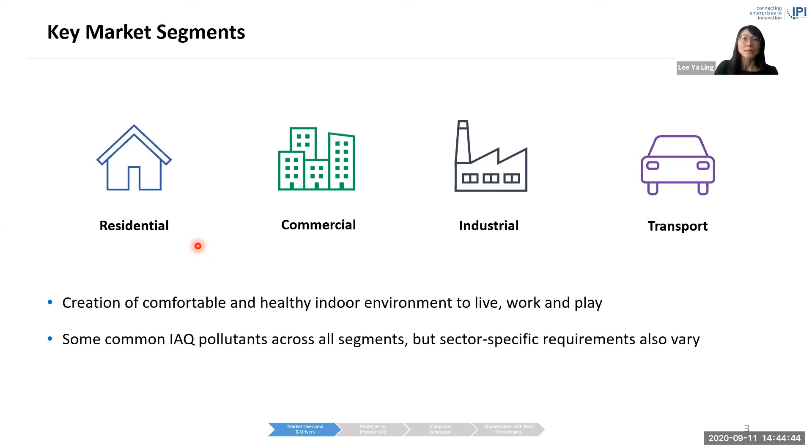So for example, in vehicles, fine particles, as well as gaseous pollutants such as NOx or SO2, would be the more critical indoor air pollutants for us to look into. In our study here, we have focused more on the residential and commercial market segments. But I'd also like everyone to keep in mind that the IAQ solutions developed or implemented in one sector may also have the potential to be cross-applied in another.

So a quick view of the IAQ market outlook. The global IAQ market solutions that cover both products and services are expected to grow by 9.5 billion by 2024. And the US market is also expected to grow and reach 12.2 billion by 2023. But the fastest growth is expected in APAC, with about 33% expected to come from this region.

But do note that these numbers came from reports published pre-COVID-19. As the market conditions are impacted by the pandemic and the constantly evolving situation, these numbers will likely change. But considering the relevance of IAQ in this current situation, we do believe that there are still growth opportunities in this market.

So we'll take a look at some of the main market drivers that can contribute to the growth of the IAQ market. Firstly, declining indoor air quality. We see now the IAQ level is declining faster than the implementation of strategies and adoption of air cleaning solutions. This also corresponds with declining outdoor air quality, due to urbanization and changing human consumption patterns. The impact of IAQ on health and well-being also significantly drives consumer demand, not only for residential air cleaning solutions, but also for healthier commercial spaces.

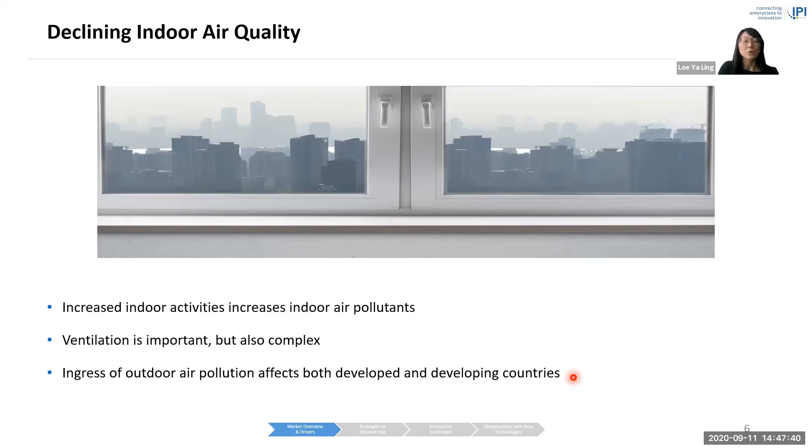In recent years, there is also increasing usage of IAQ monitors, which also plays a part in augmenting the occupants' awareness of the importance of IAQ. The pandemic has also amplified the observation that consumers are becoming increasingly aware, or conscious, of the importance of the safety aspect of indoor air, because we know that indoor spaces pose a higher risk in the spread of airborne diseases compared to outdoor ones.

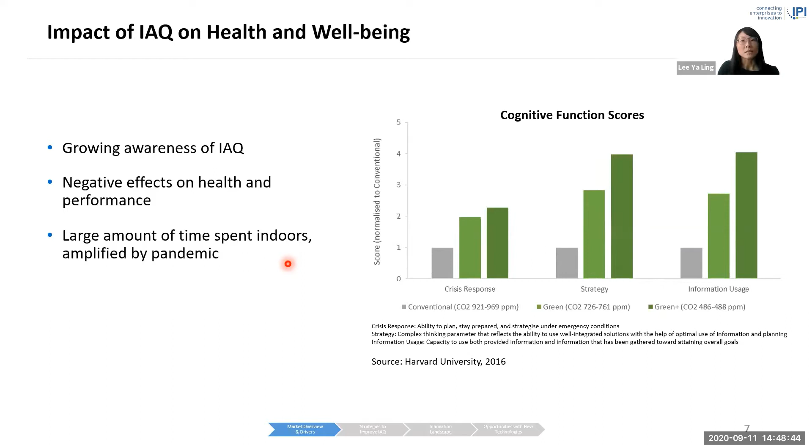The drive towards green buildings started some time ago, and we do not think that it's slowing down. A green building report also showed that environmental regulations are a key trigger for green building in several countries, including Singapore. So over here, we have building regulations and plans in place so that new buildings as well as existing buildings that undergo major retrofitting are to meet our minimum BCA Green Mark standards.

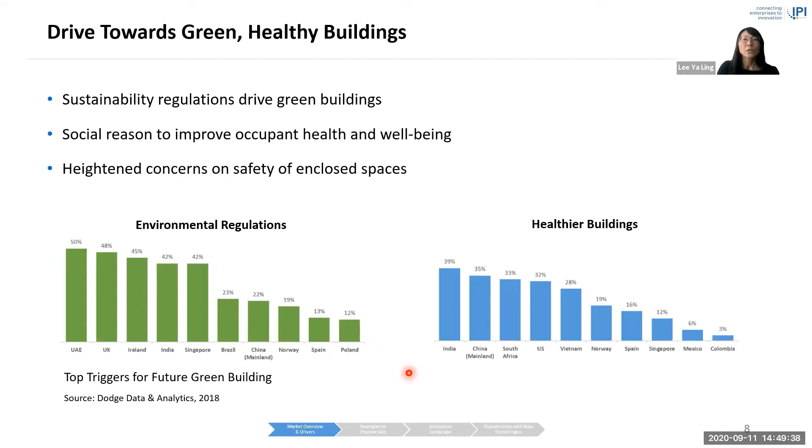So although not all countries have incorporated IAQ requirements in their building codes, countries such as Japan, South Korea, Vietnam, as well as Thailand do have some mandatory requirements. So besides environmental regulations, another top trigger is healthier buildings. In general, the pandemic has forced us to address this issue and may further spur the trend of healthy buildings.

But of course, the IAQ market is not without its challenges. So firstly, indoor air pollution itself is quite a complex challenge. There are multiple pollutants that come from different sources, each requiring different strategies to tackle. It's also influenced by factors such as temperature, humidity, and even poorly maintained air purifying systems could become a source of pollutants.

IAQ monitoring also plays a very important role nowadays. While there are multiple sensors that can detect and measure, say, PM2.5, CO2, and humidity, not all air pollutants are as detectable. For example, for biological contaminants, different tests are still required in order to identify them.

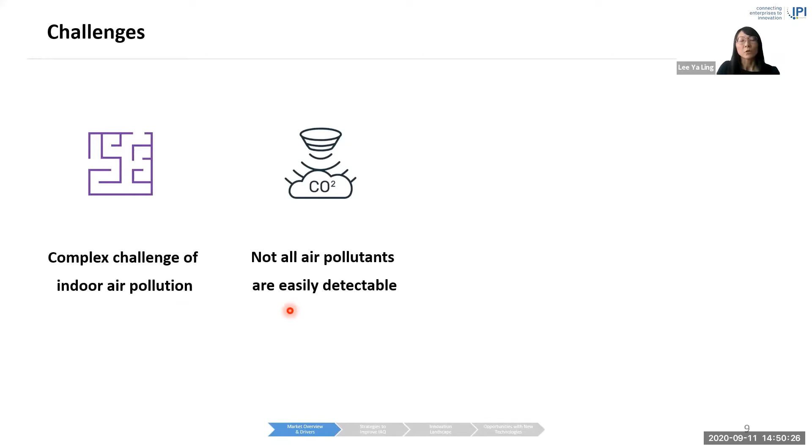Increased ventilation will lead to increased energy loads, of course. And with the ACMV systems contributing about 40 to 50% of the building's energy costs, and also keeping in mind that pressure drop from the use of air filters can also impact energy efficiency, the balance here is important.

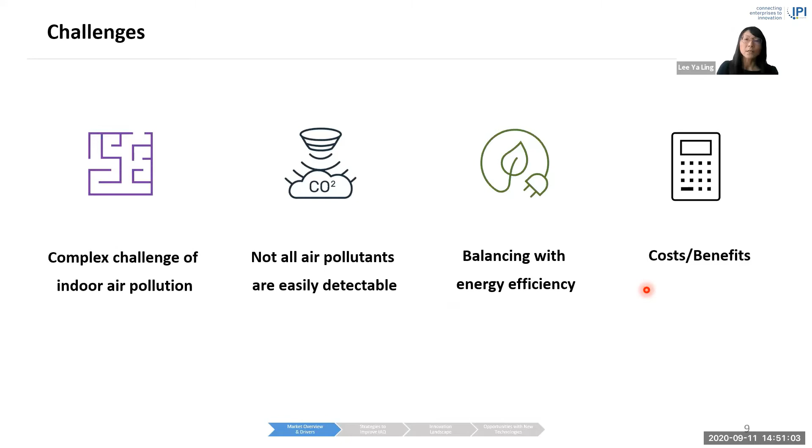And also, despite the known risks of poor IAQ, the related costs are still a key determinant in its implementation. So determining the overall business case can be quite complicated when the benefits of IAQ are not always immediately apparent, and also when costs are borne by different parties.

So nevertheless, we do think that there are still certain gaps and opportunities to address these market challenges as well as the market drivers. For example, end users can consider designing in IAQ at earlier stages as a form of preventive measure, instead of spending additional resources later on to resolve certain issues, which can be more costly at times. And with the pandemic, it's definitely pushing for more action to make our indoor spaces as safe as possible. Such improvements may no longer be considered optional in the new norm.

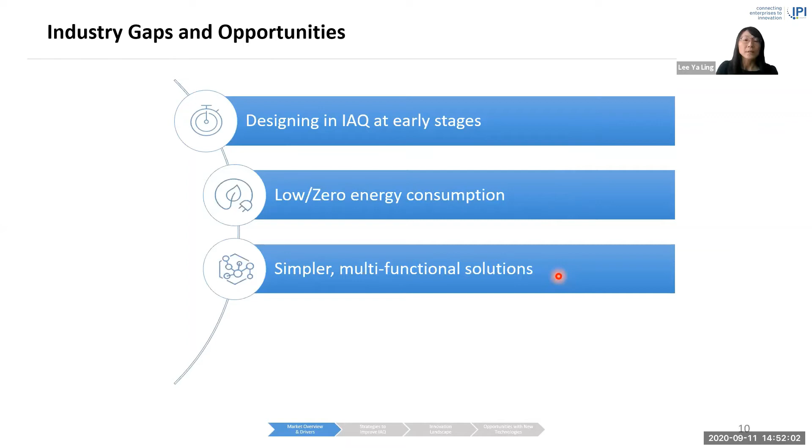Energy efficiency, of course, being a key component, it is also important for IAQ solutions to be low or zero energy consumption if possible. And to a complex IAQ issue, simpler and multifunctional solutions can be a desirable response. When trying to improve IAQ, the main strategies adopted are often based on controlling the source or the ventilation, but further enhancements may be required. This could be through additional air cleaning measures or dynamic systems that can better respond to changing conditions.

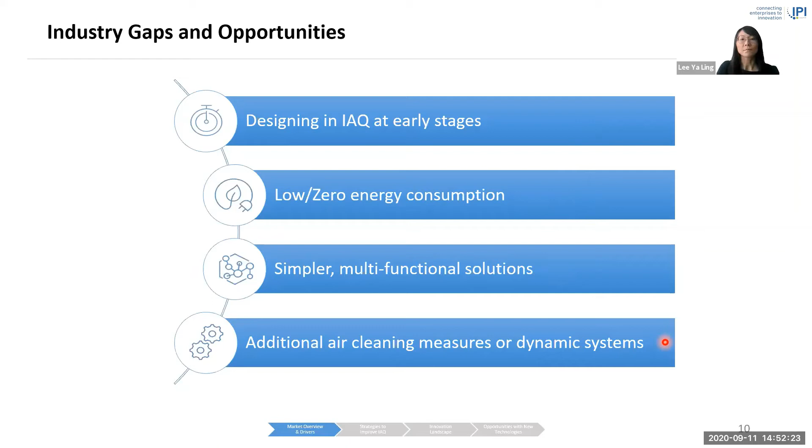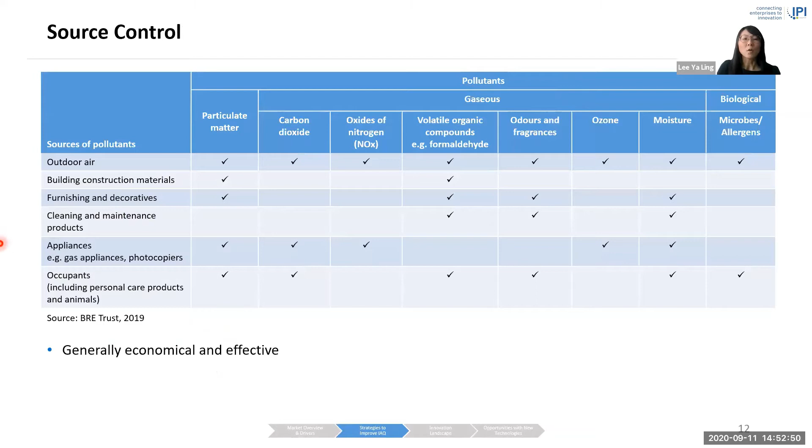For example, VOCs like formaldehyde are known to be emitted from furnishings and decoratives like paints and wooden furniture. But there has already been a lot of development in this area to produce low or no VOC green building materials. If these are replaced, the amount of VOC pollutants in the environment can be significantly reduced. But it is also unlikely for us to be able to remove pollutants completely.

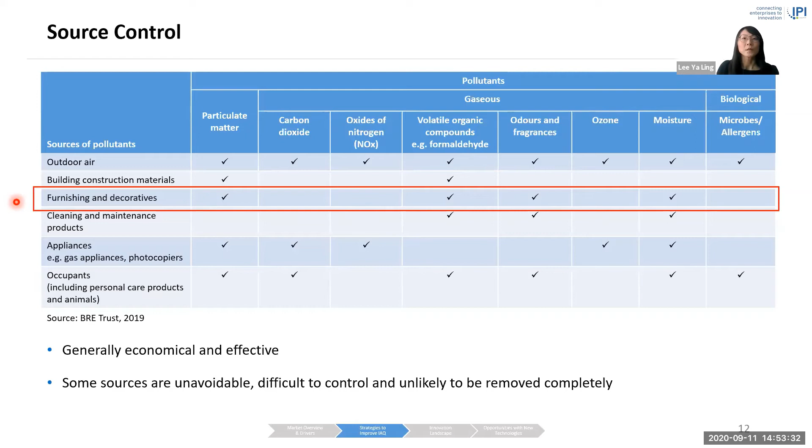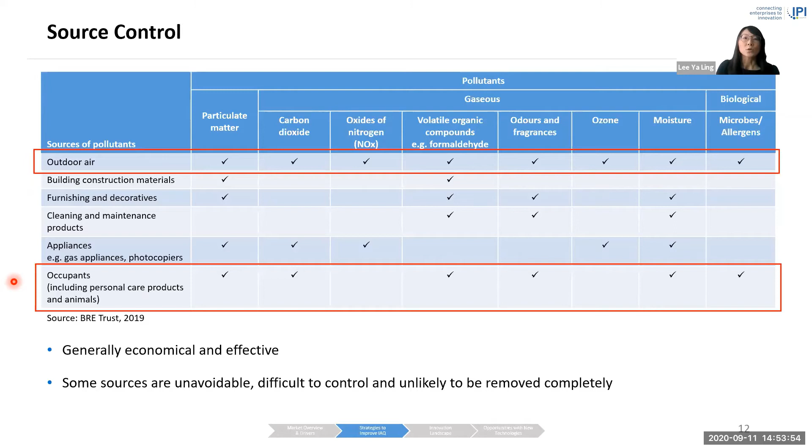Using this same example, green building materials typically come at higher costs, which can continue to deter more price-sensitive consumers and businesses. And in some cases, it could simply be not within our control, for example, outdoor air quality or pollutants generated as a result of occupancy. And during this current pandemic, where we're doing more cleaning, using more disinfectant products, which are often aerosols or alcohol-based, these also contribute as a source of indoor air pollutants.

So next we look at ventilation, which is really an essential and proven strategy. Studies have shown the health and well-being benefits of ventilation. And in times of the pandemic now, it is also a very fundamental strategy that is being recommended by experts. But achieving good ventilation control, particularly in commercial spaces, is really not an easy task.

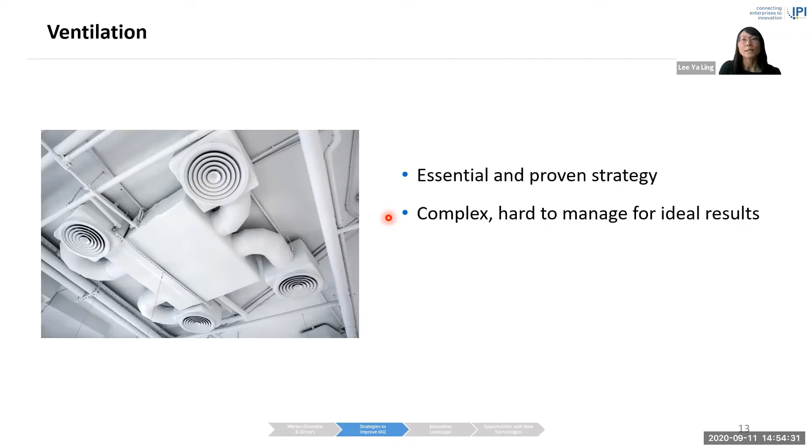Here, getting the airflow optimized for effective ventilation can sometimes be quite challenging because the actual airflow in real occupied spaces often deviates from modeled scenarios, because internal spaces can be modified, say, by furnishings or by additional partitions, etc.

Ventilation controls have definitely become more advanced now, enabling more timely as well as energy efficient ventilation that actually can respond to demand. But adding such controls to existing systems can also be challenging if you look at the higher costs associated with the installation and maintenance of the multiple sensors, as well as integration with the building management systems.

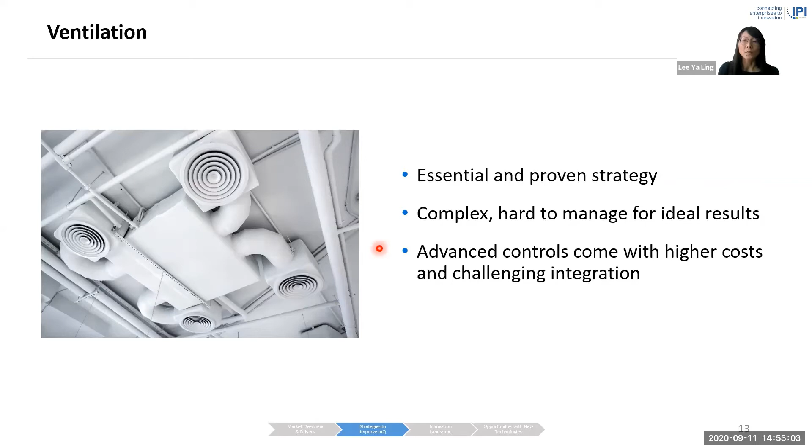Air cleaning involves the passing of air pollutants through a system for the removal, destruction, or transformation of air pollutants. So it should be noted here that, of course, the effectiveness of air cleaning will be reliant on the airflow rate as well as the operating time of such systems. Air cleaning is also proven actually to be a strong complement to source control and ventilation.

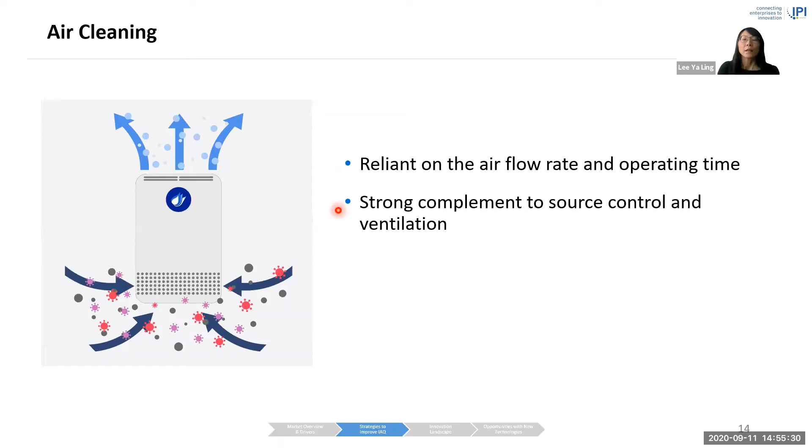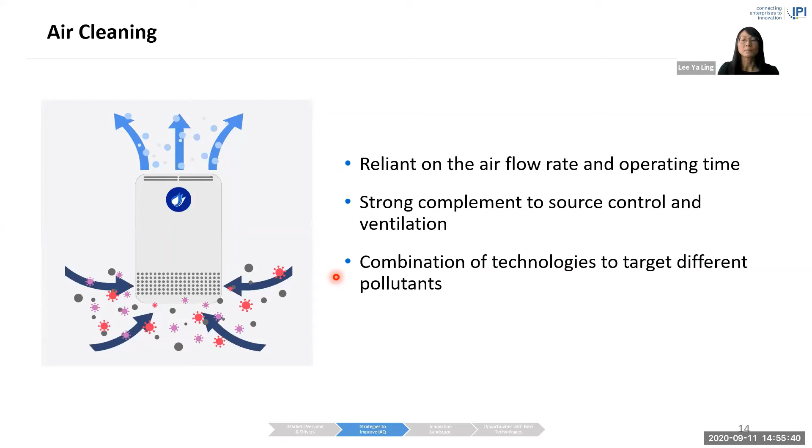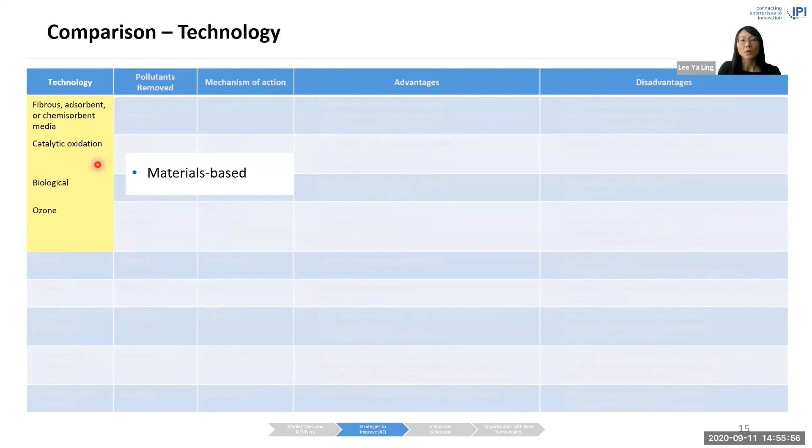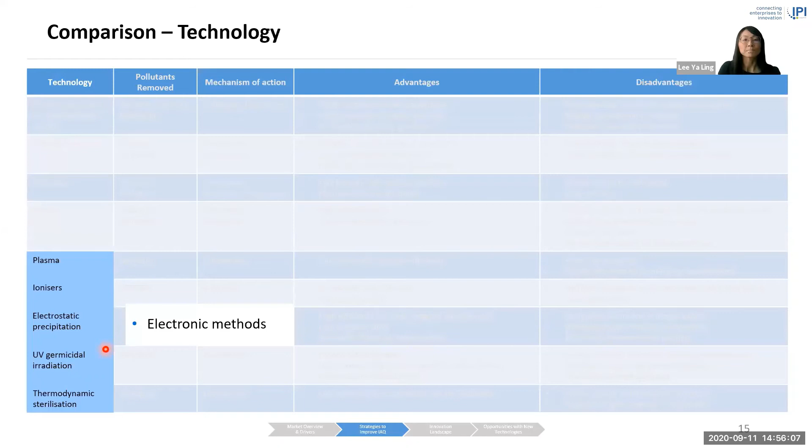Firstly, materials-based. We're looking at the filters, catalysts, biological materials, or ozone. There are also electronic methods, including plasma, ionizers, electrostatic precipitation, etc. They compare in terms of the types of pollutants being removed by each type of air cleaning technology.

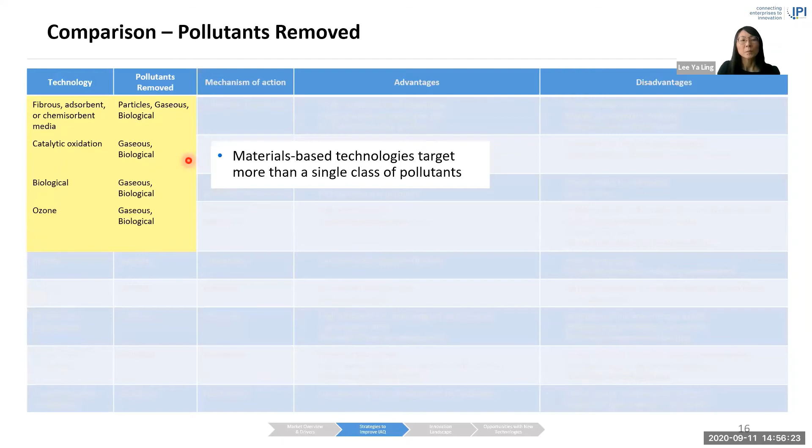Of course, we see here materials-based technologies actually can target more than a single class of pollutants. If you see in this table here, they are actually able to tackle about two of them at least. Whereas on the other hand, electronic methods tend to focus on a single class of pollutants.

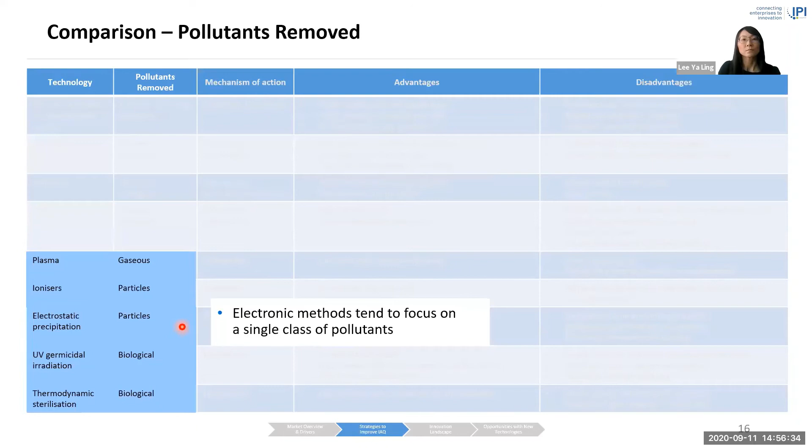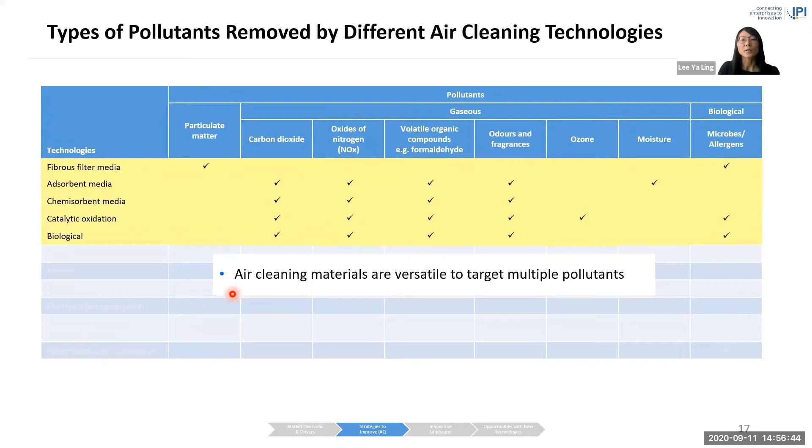So here we see another view of the type of pollutants being removed by the different air cleaning technologies. So generally here we see how air cleaning materials are more versatile in targeting the different types of pollutants.

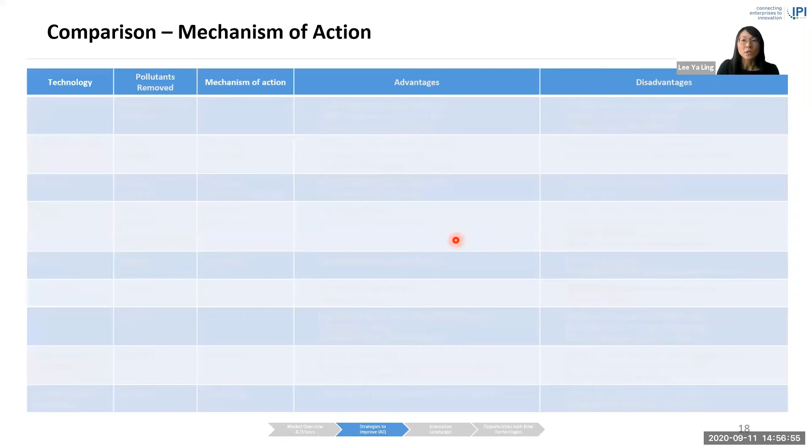So now in terms of the mechanism of action, which is how the air cleaning technology actually works in removing the pollutants, in terms of the working principle, one of them is by collection. So that is really they are collecting and trapping the air pollutants. Say for example, for the fibrous filter media, that's how it works in terms of trapping dust particles.

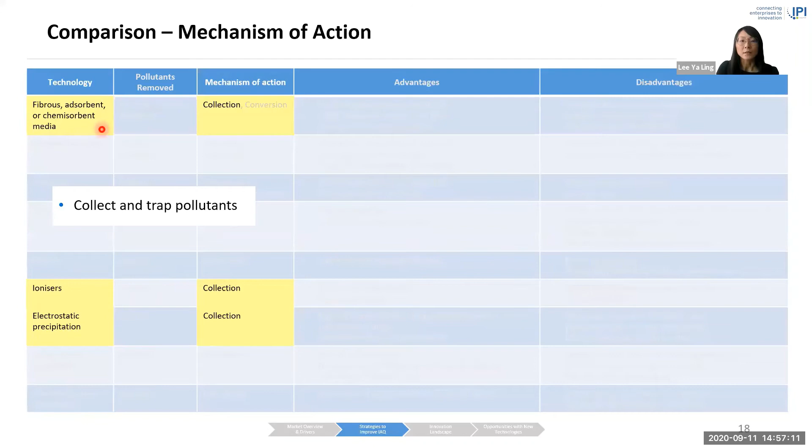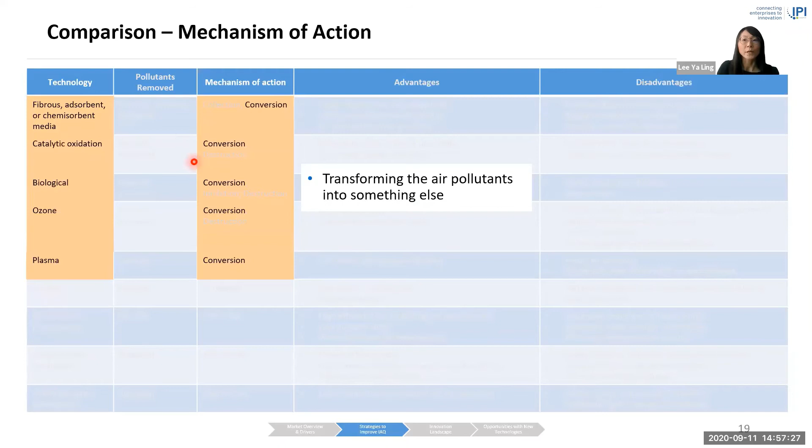There's also some that actually convert the air pollutants into something else. So for example, catalysts used in the catalytic oxidation processes can actually convert, say for example, formaldehyde into CO2 and water through a chemical reaction. Others destroy the air pollutants. So for example, there are some biological materials that can actually kill the harmful microorganisms.

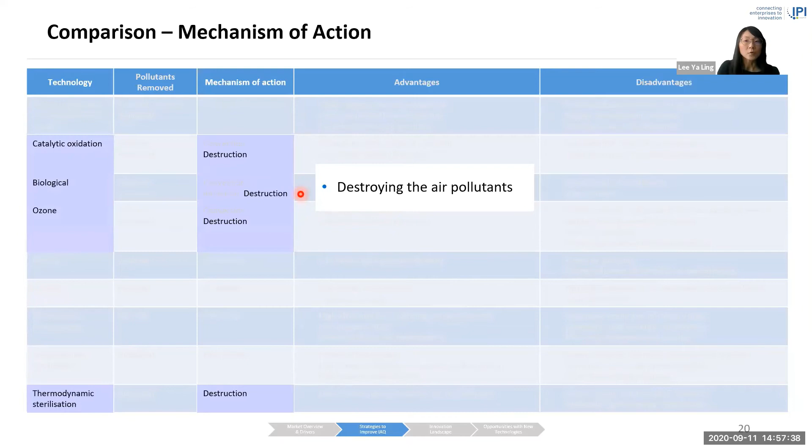But of course, each air cleaning technology also comes with its own pros and cons. And in general, a lot of the air cleaning technologies have high theoretical efficiencies as the key advantage. What I want to really point out here is theoretical efficiency, because as we all know, how the air cleaning technology is designed into the system, how it's being deployed, and how it's being maintained can still affect its performance level.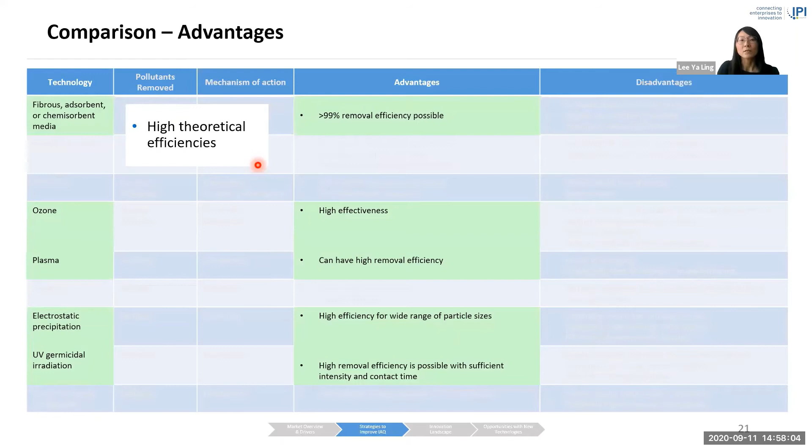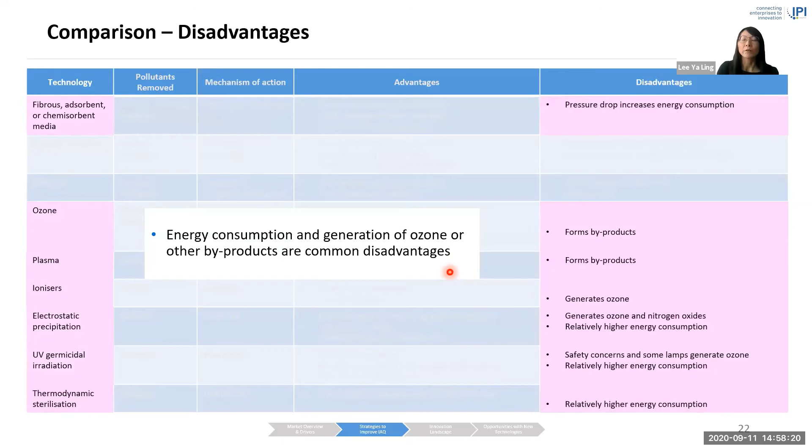And in terms of disadvantages, energy consumption as well as the generation of harmful byproducts such as ozone or other chemicals are actually some of the most common disadvantages found in quite a few of the existing air cleaning technologies.

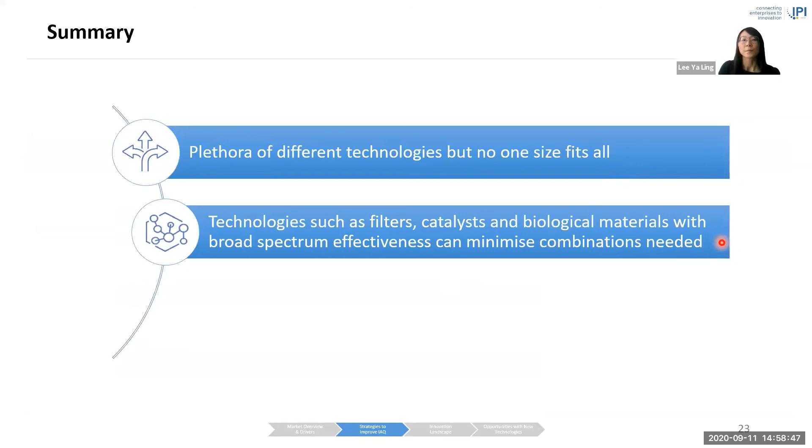So in summary, there are a number of different technologies and solutions available in the market, but there really isn't a one-size-fits-all. And with the use of materials or technologies with broad spectrum effectiveness, we could possibly minimize the number of combinations needed. And such multifunctional technologies, which work on their own passively, could also improve energy efficiency.

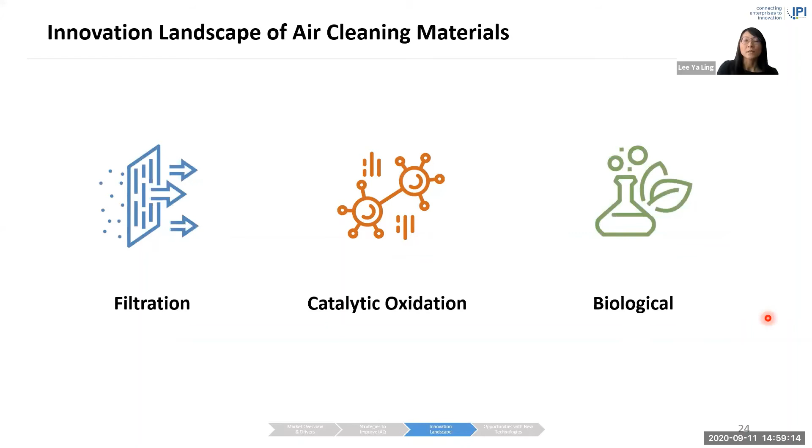So with that in mind, we'll now zoom in and take a closer look at the innovation landscape of filtration, catalytic oxidation, and biological methods. So by making use of a patent landscape study, we can actually gather some insights into the innovation activities surrounding the development of these different technologies.

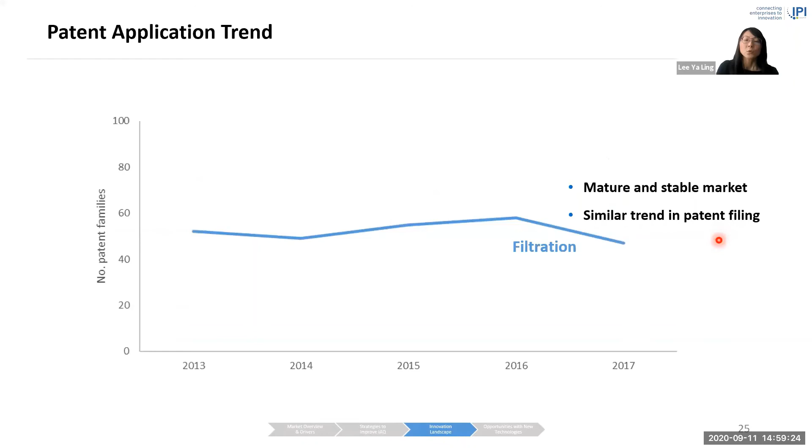So first, we'll take a look at the patent application trend. So filtration is by itself a mature and stable market. So we are actually observing a similar trend here in terms of patent filing.

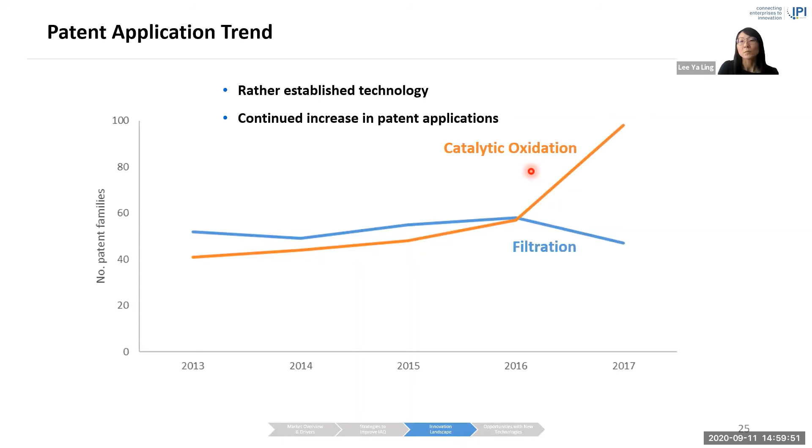Catalytic oxidation is a rather established technology, but we are still seeing quite a lot of development here in terms of different applications, as we see it gaining traction as well in the IAQ market. So we are seeing a similar trend here as well. This increase could also be due to the fast growth in the number of Chinese patents around this period of time. And for biological air cleaning methods, it's still an emerging area with a lower number of patent applications. But with increasing interest in natural and sustainable solutions, this area is expected to continue to grow.

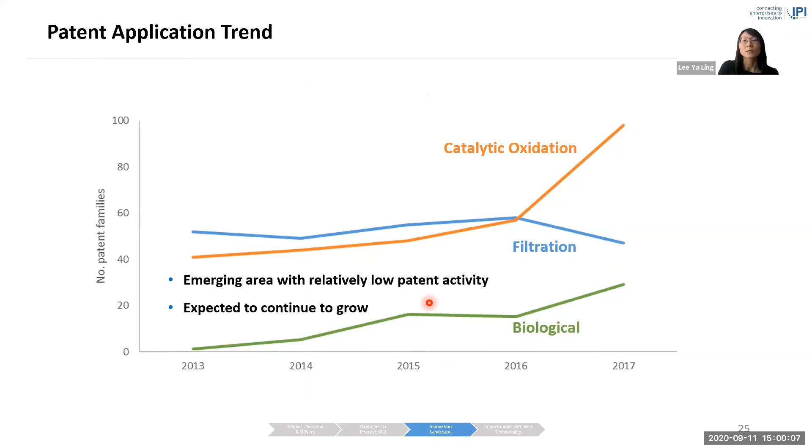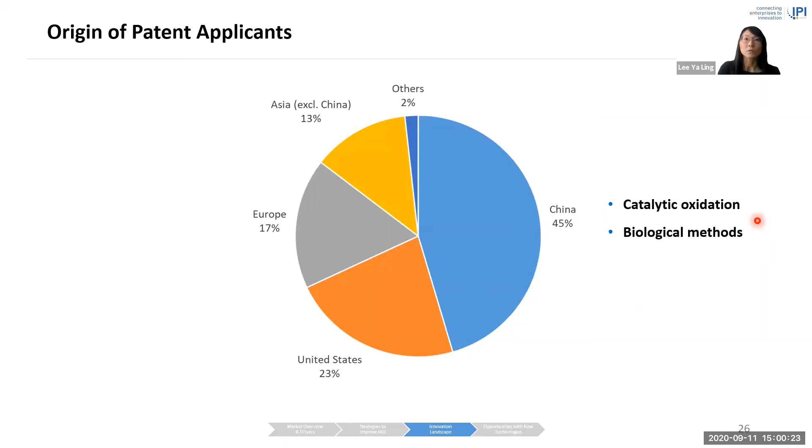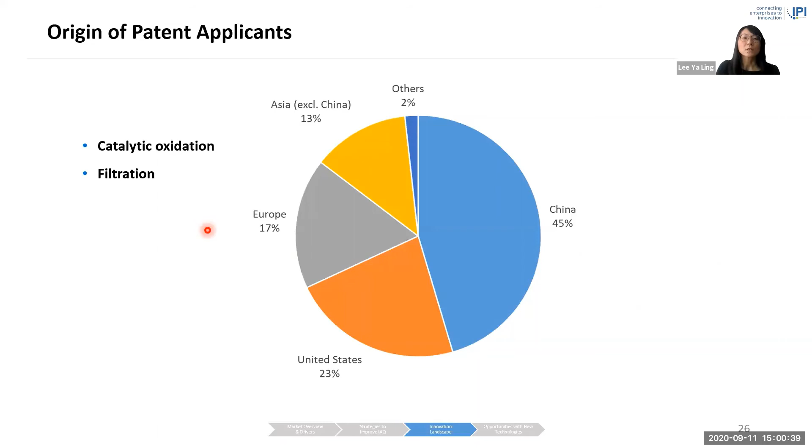In terms of who is filing these patents, we see Chinese organizations leading in this area, with a particularly strong focus on catalytic oxidation as well as biological methods for air cleaning. On the other hand, US organizations dominate in filtration technology. And for European as well as other Asian organizations from Japan, South Korea, and Southeast Asia, the focus is more on catalytic oxidation as well as filtration technologies.

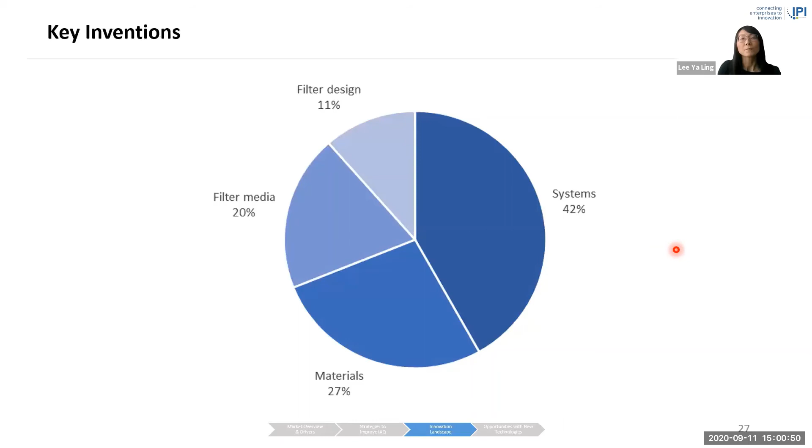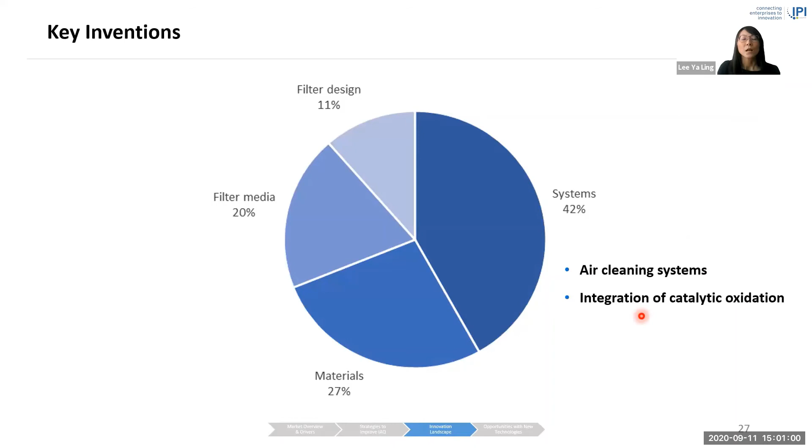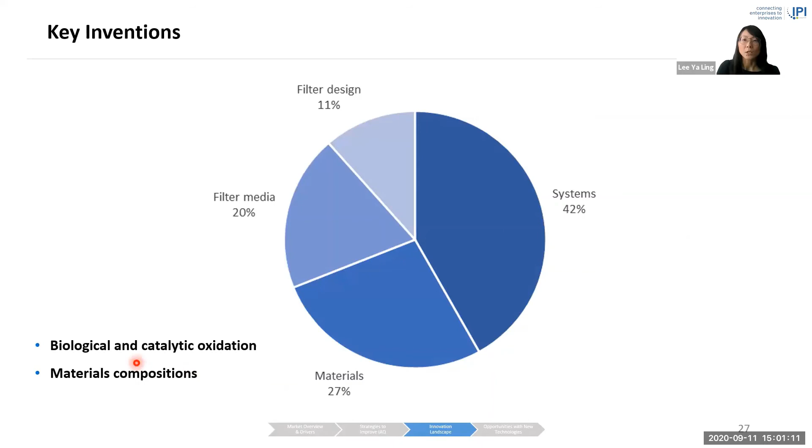We also analyzed the kind of inventions being described in these patents. The majority focused on the development of air cleaning systems, particularly those that look into the integration of catalytic oxidation. Other patents describe the components being used in such air cleaning systems, for example, material compositions that use either biological or catalytic oxidation materials. There's also a portion looking into filter development, where organizations look at fiber materials and composition, surface treatment of the filter media, as well as filter assembly design.

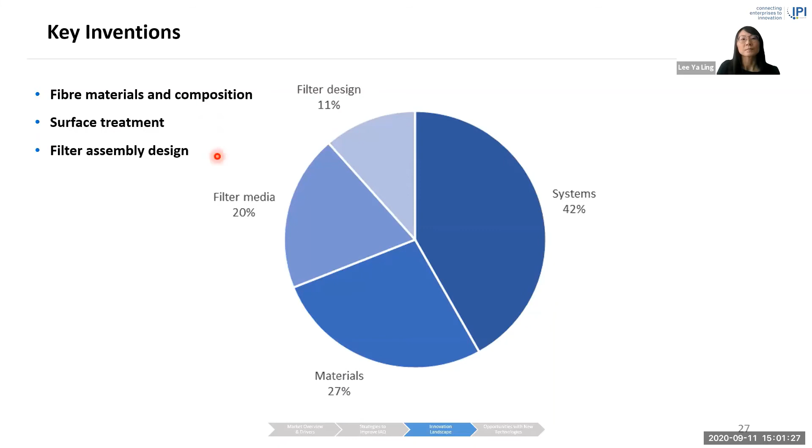We'll now take a look at some of the insights that we have from each technology. Filtration being a mature market, it was observed that the patents here are mainly filed by commercial entities rather than research or academic institutions. Innovations here are considered incremental because they are focused more on improving the performance or the energy efficiency of existing filter technologies.

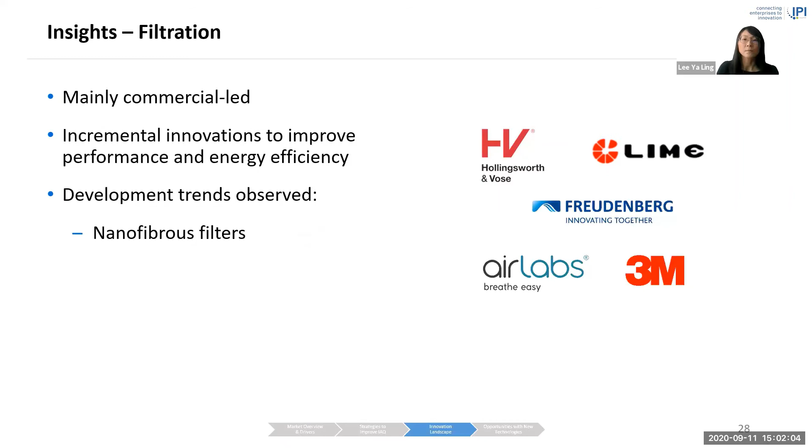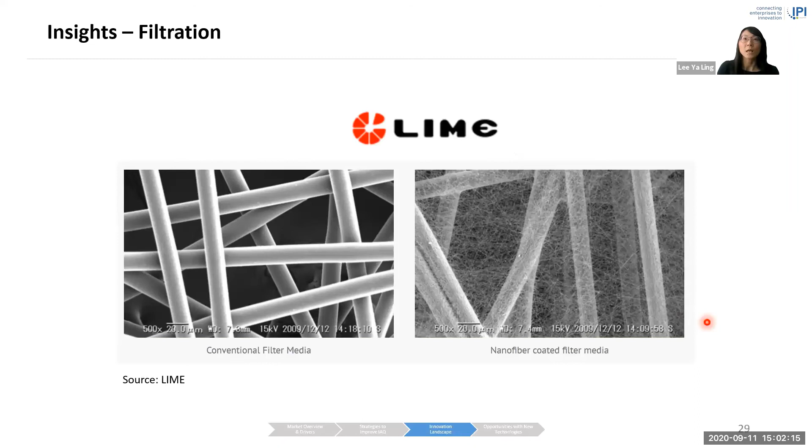Nevertheless, there are still some development trends that we have observed, for example, the continued development of nanofibrous filters. One example here is from Lime Inc., a South Korean company with their nanofiber technology. These 3D networks can further increase the deposit as well as the absorption areas for fine particles. There's also some work on fixation of functional particles on the fibers to obtain multifunctional filters. Such particles could be absorbent materials or metal organic frameworks. One example here is from Airlabs, a UK startup with a composite filter for different gaseous chemicals.

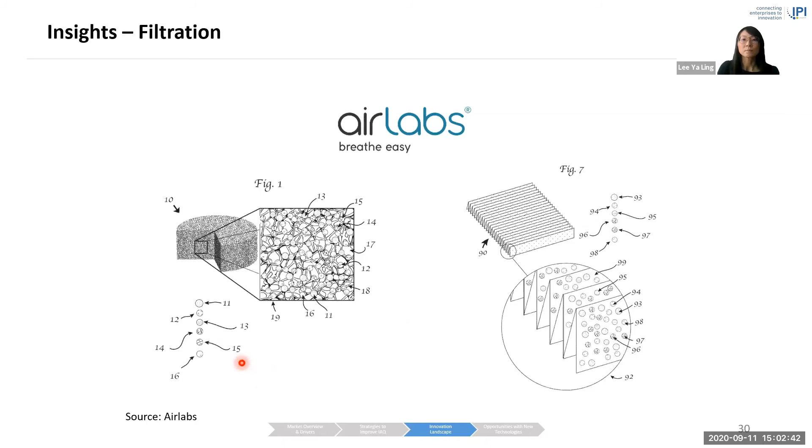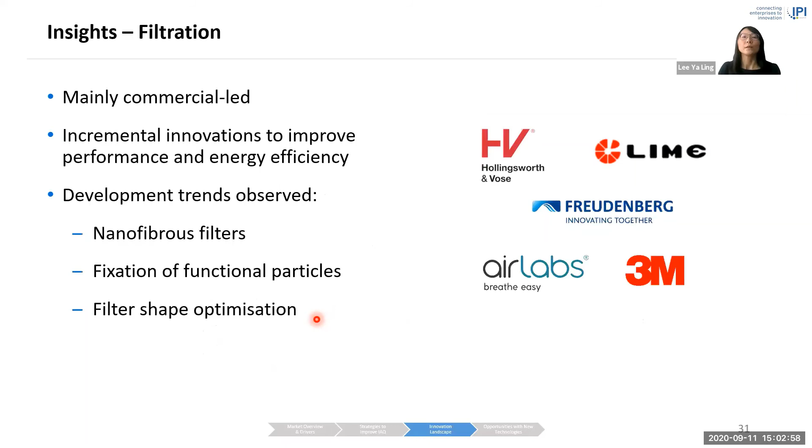In terms of redesigning a filter's physical configuration, the most common is the optimization of its shape, such as adding conical or spherical structures to increase the contact time between the polluted air stream and the filter media.

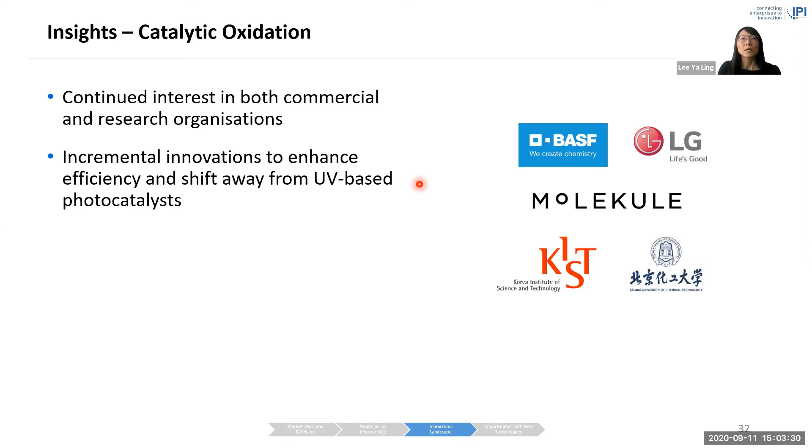As catalytic oxidation is gaining traction in terms of actual product applications, there is interest from both commercial and research organizations. We see these also as incremental innovations, mostly looking at enhancing performance efficiency, but we have also observed a shift away from UV-based photocatalysts, meaning the development of catalysts and materials so that the reactions can happen in the absence of light. This could translate to more energy efficient as well as less costly systems.

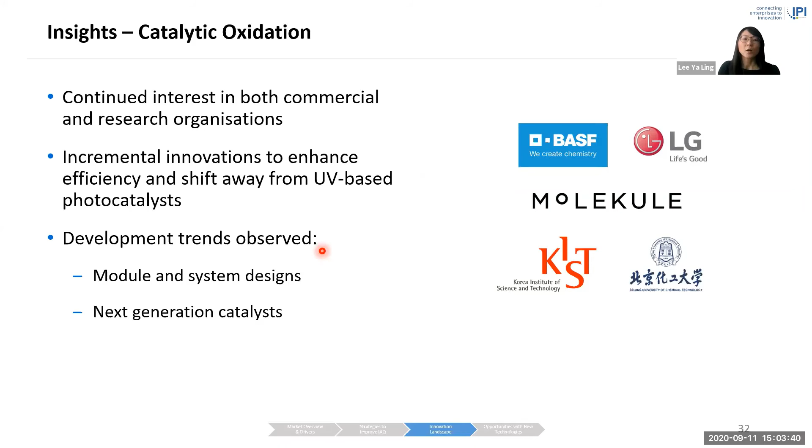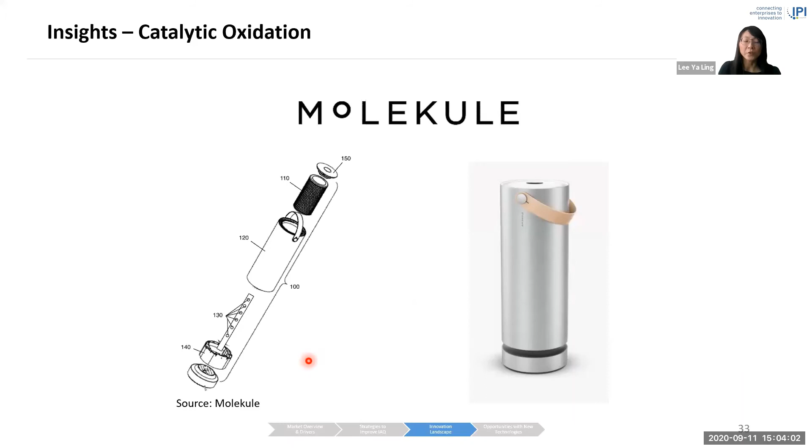The development trends observed revolve around two areas. There's quite a bit of work in product development for the module as well as the system designs. One example here is from Molekule, a US startup that has developed their proprietary photoelectrochemical oxidation technology that can remove both VOCs and microorganisms.

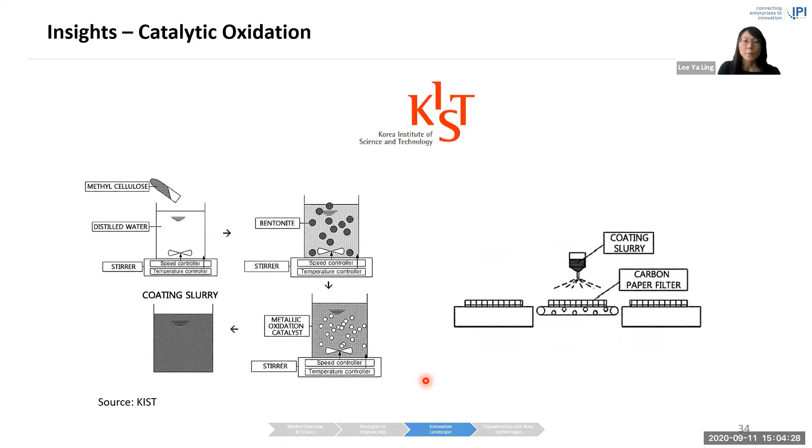There's also increased development of next generation catalysts: next generation TiO2 catalysts, as well as those based on noble metals or transition metal oxides, such as this one from the Korea Institute of Science and Technology. They have developed a low temperature, light-free manganese titanium catalyst meant for VOC oxidation.

Biological air cleaning is still an emerging area, so the innovation landscape is rather fragmented and there isn't really a leading player. With the use of plants, plant extracts, bacteria, and enzymes as the core air purification materials, biological air cleaning has strong characteristics of sustainability, such as non-toxicity, environmental friendliness, and the ability to purify air without secondary pollution. These are some of the key advantages of a biological-based solution.

And even though some of the methods here focus mainly on the removal of VOCs, there are also solutions that actually demonstrate the potential for tackling biological contaminants. So in terms of the development trends observed, there are organizations that are looking at airflow improvement for those systems that are based on plants. This is really to maximize the contact between the polluted airstream and the plant's root systems, where the air cleaning is actually happening.

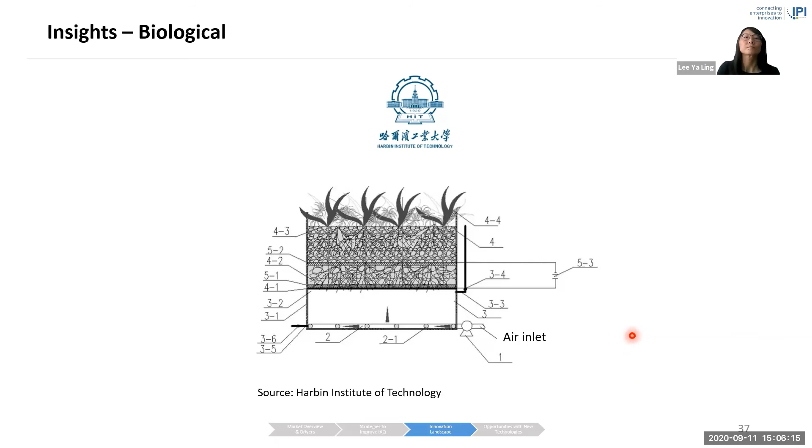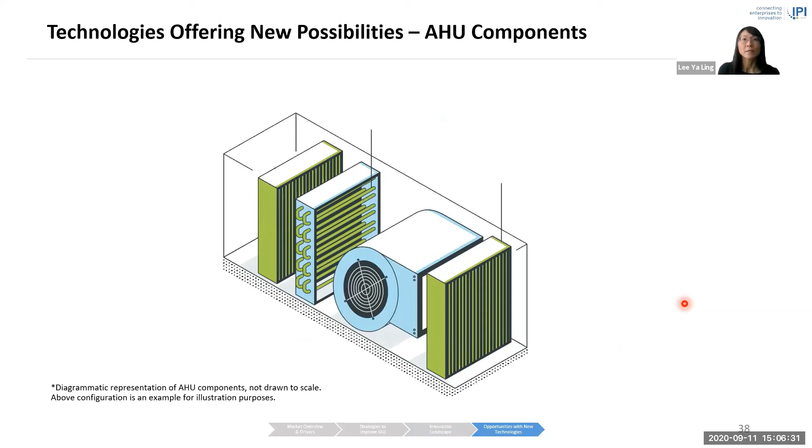So we'll now take a look at some of the technology offers available that provide us with new possibilities when incorporated into IAQ solutions. One example to explore would be the air handling unit for an ACMV-based system. This is an example configuration for illustration purposes. For example, there's potential to explore the application of a biofilm coating based on odorless microorganisms on the cooling coil. This biofilm can prevent the inhabitation of other odor-generating or pathogenic microorganisms.

Another example, enhanced air filters with catalysts may be used to remove VOCs, for example, those accumulated in recirculating air. Nanofibrous filters could also enhance particle collection efficiency here. So instead of using separate filters for different pollutants, multifunctional filters like this may help in reducing the overall pressure drop, hence help in energy efficiency.

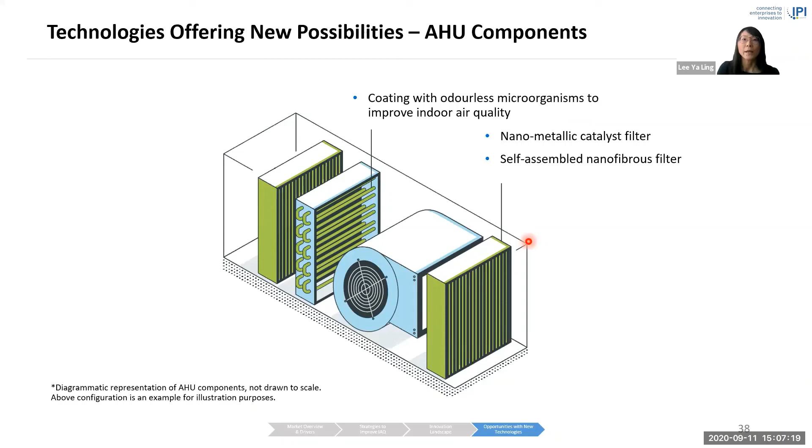There are also available technology offers with potential applications suitable for our indoor environment, be it residential or commercial space. For example, the nanofibrous filter that you saw in the earlier slide could also be produced in such a way to become window filters. This could be beneficial in certain regions where outdoor air pollution is more severe. Nanofibrous filters functionalized with other properties can also be used for smaller air purification systems. Our next speaker from EWT-COI will be sharing more on their development in this area.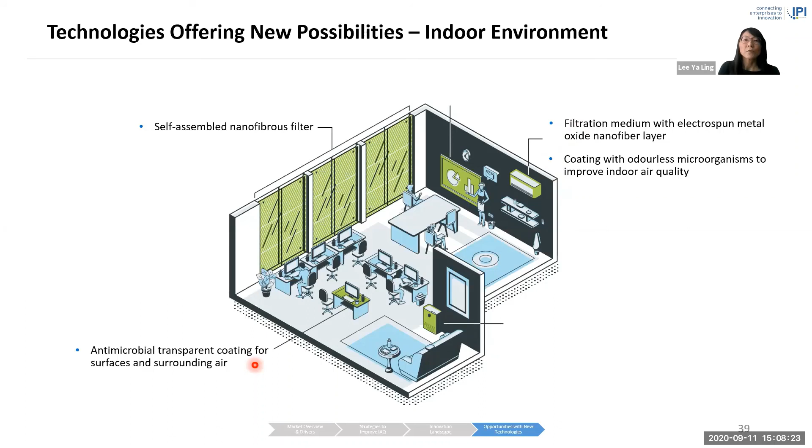Another example, similarly, the biofilm coating that you saw on the previous slide could also possibly be incorporated into another product format, for example, an air conditioning unit. Alternatively, we could look into antimicrobial coatings that can be applied on high-touch surfaces, which could also provide some support in purification of the surrounding air. Such coatings may also find applications in air filters, serving to minimize the growth of microorganisms on these filters. You'll hear more about antimicrobial technology later from our guest speaker from Polymer Materials.

There's also development of air purifying systems based on microalgae, which may be installed to remove CO2. They are absorbing and converting CO2 into oxygen. Reduction in indoor CO2 is also associated with a reduction in energy used for ventilation and cooling. Another example here uses a photosynthetic algae system. This company is using microfluidic technology to improve the efficiency of their photobioreactor.

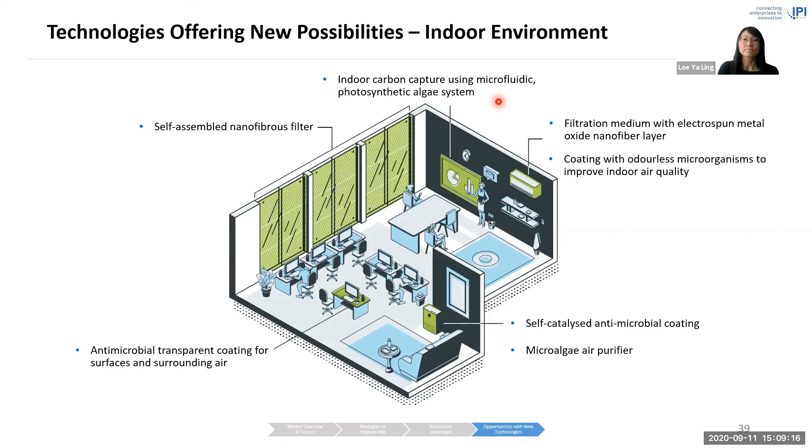So finally, we'll take a look at what are the potential adjacent markets. Technologies designed for the IAQ market can also have cross-industry applications that provide us with opportunities to explore in others as well. For example, cold chain logistics, refrigeration, as well as agriculture involve enclosed spaces as well. There are certain environmental parameters such as CO2, oxygen and humidity that can influence the quality of the products in these spaces. IAQ solutions designed for the removal of CO2 and VOCs could potentially be modified to suit these applications. Odor and biological contaminants are also present in many other industries, so similarly, technologies could be optimized to suit these different applications.